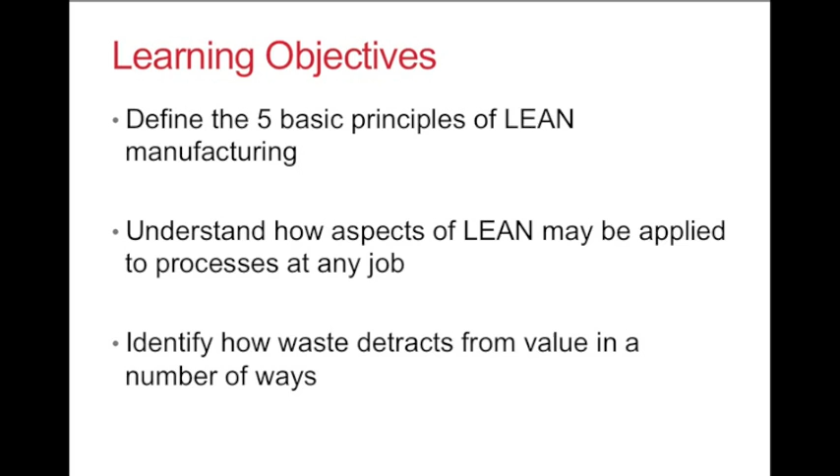Developed by Toyota, lean manufacturing is a methodology that aims to eliminate physical and time waste in order to achieve a more efficient and sustainable process. Lean can be applied to any business or production process in any industry.

The most desirable outcome of a lean process is cost savings, especially in the US, who need to compete with manufacturing in lower cost countries. If the 5 key principles of lean are implemented correctly, lean can improve efficiency, cycle time, productivity, material costs, and scrap material.

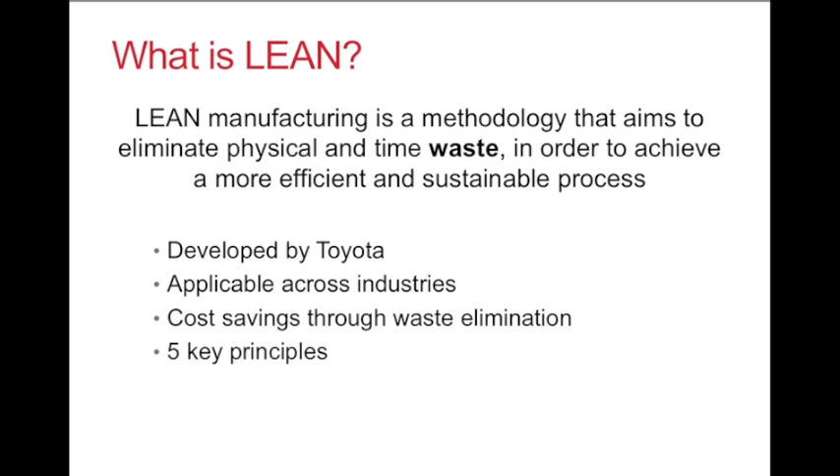The first principle of lean is understanding the value your product provides to the customer. The specific benefits of the product need to be defined by its customer base. Value determines how much a customer is willing to pay for a product and what the manufacturing timeline will be.

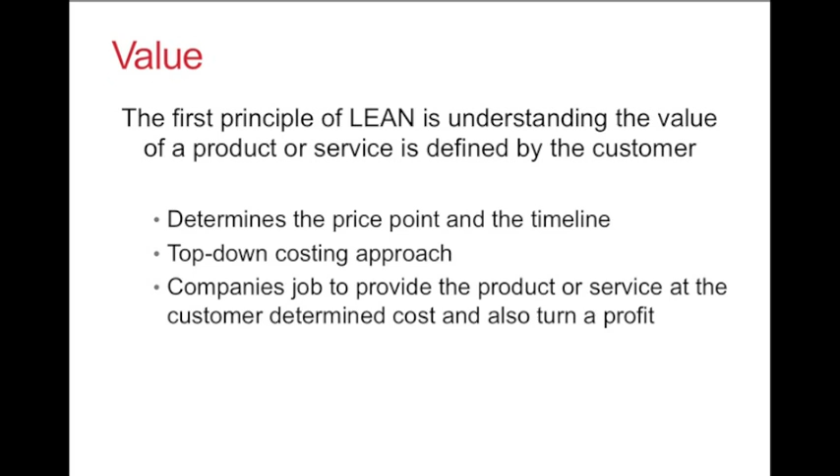Allowing the customer to determine value leads to a top-down target costing approach. Therefore, it is the company's job to eliminate waste and thus cost from the manufacturing process so that the customer price point can be met at a profit to the company.

The second principle of lean manufacturing is defining the value stream within a given organization. Once the value of a product or service has been defined, the company must be able to create value without producing waste. In other words, the company must map out all the steps it takes to turn raw materials into a deliverable final product. These steps may include design, production, procurement, HR, administration, delivery, or customer service.

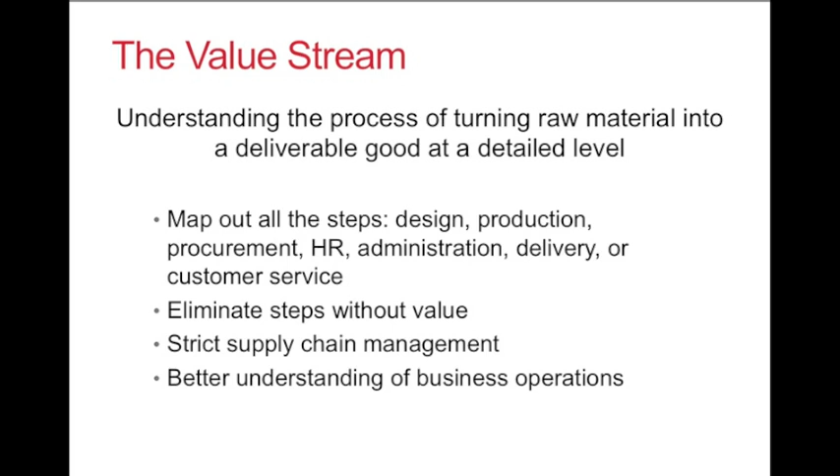This process aims to identify steps that do not add value and identify ways to eliminate them. Lean advocates strict supply chain management as a way to eliminate waste. Understanding a value stream ultimately leads to a better understanding of the entire business operations.

Once the process value stream has been rid of waste, the next step is to ensure the remaining steps flow. Flow is often considered the most significant step in the process. This process should have no interruptions caused by delays or bottlenecks. Any halt of the value stream is waste.

The value-creating steps should flow smoothly, delivering the product to the customer as efficiently as possible. Each aspect of production and delivery of the product should be fully synchronized with the other elements. This may require cross-functionality across departments, which is often a challenge when adopting lean principles to an organization. However, success in implementing the flow step properly can lead to up to 50% improvement in overall efficiency and productivity.

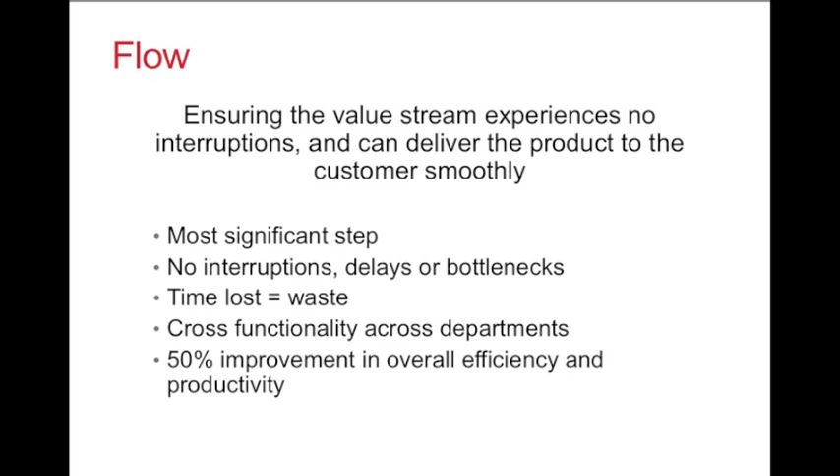When a system is becoming lean, the flow will improve. Improved flow or time to market will be drastically improved. This leads to the product being delivered only as needed, or just in time.

Because the customer can pull the product only when it is needed, products no longer need to be stocked by a company in advance. Stocking inventory creates expenses in both space and management, which are wasteful. The pull approach to just-in-time manufacturing ensures nothing is made ahead of time and nothing builds up work-in-process inventory that stops flow. Production is pushed based upon a forecast and a schedule.

In a pull system, nothing is made until the customer orders it. Achieving a pull system requires flexibility and short production and delivery time cycles.

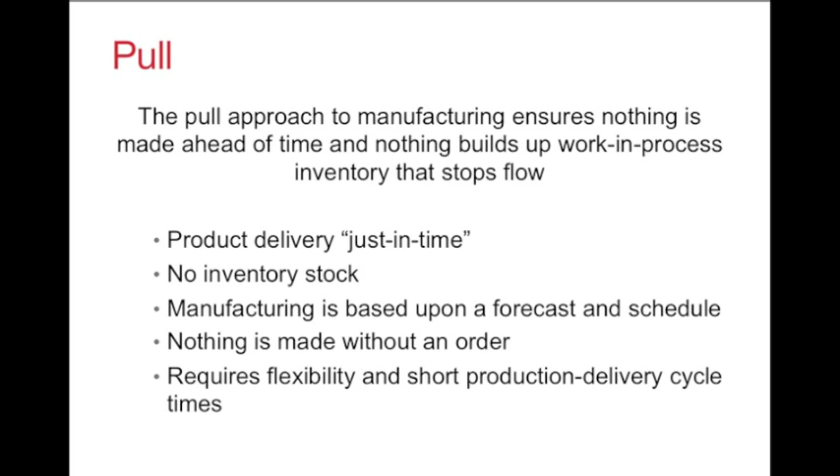The fifth and final principle of lean manufacturing is perfection. A process must be continually improved upon. Lean thinking must become a part of the company's culture in order for it to continually improve competitiveness and customer satisfaction.

Lean is not a static system, and constant attention must be paid to all steps in the process by every member of the team. Lean companies are marked by a relentless pursuit of perfection.

The goal of a lean system is to systematically and continuously identify the root cause of poor quality and remove it from the process. Lean experts have said that a process is not truly lean until it has been through value stream mapping at least half a dozen times.

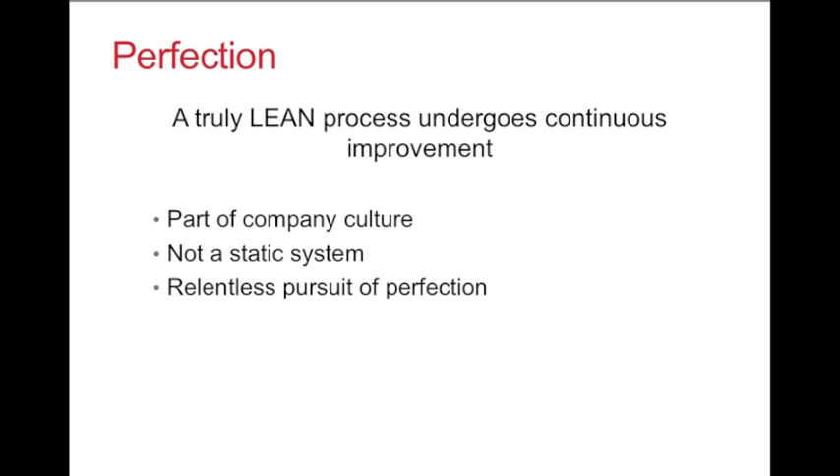If you're interested in learning more about lean manufacturing, you can explore these questions. How could lean principles be applied to increase efficiency in an office, lab, or in your daily life? How does lean compare to other improvement processes such as Six Sigma?

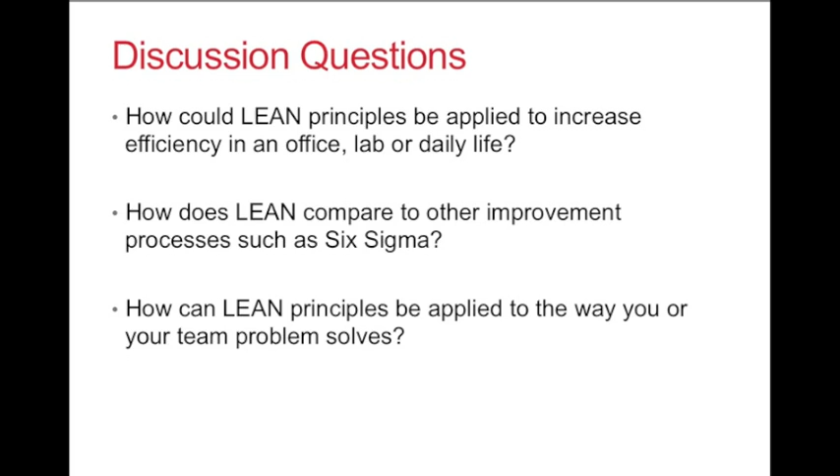How can lean principles be applied to the way you or your team problem solve? Thank you for your time.